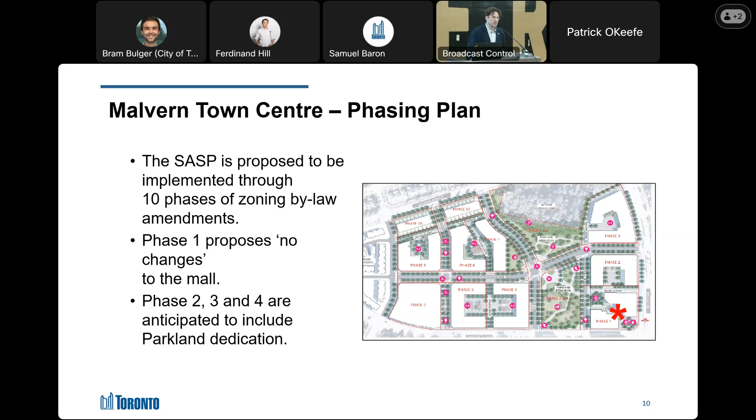As I mentioned, the one of most immediate consequence is the 32 and 39 story building on the surface parking lot. For those watching virtually and those in attendance tonight, it's where the red star is on the screen - that's the corner where they're seeking approval to build a 32 and 39 story building in the immediate future. Of course, this is all very early in the process, so we're here to hear from you this evening. We also have a lot of questions about the phasing plan and how this would relate to the operations of the existing mall on site today.

So how does the City of Toronto evaluate development applications? Let's say that somebody wants to go from this to this. How do we evaluate whether or not that sort of change is in the public interest?

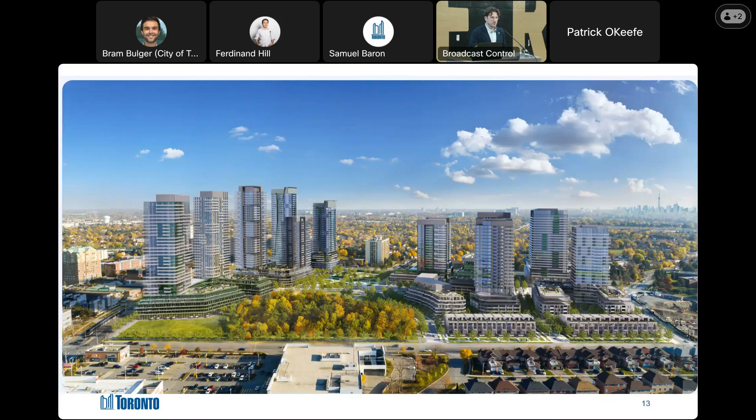In determining the public interest, city planning works to balance public, private, and community interests as part of our work. We look to a number of factors which help us make a recommendation to City Council on whether we can support an application like this. These factors essentially can be categorized into four different baskets.

The first thing we look at are the facts of the development proposal. So we look at the details of the height, the density, the number of parking spaces, and the physical context of the area - basically the surroundings of the site.

Secondly, we look at planning policies. The province has policies that we have to adhere to, and there's the City of Toronto's official plan, which is basically guiding development and change in the city - it tells us how to manage change. And then we have laws that we adhere to, like zoning bylaws and other land use planning laws that we are required to follow.

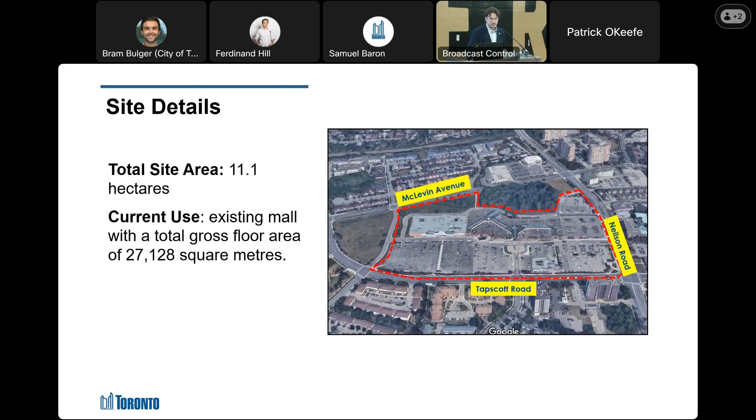Zooming out a bit, you can see McLevin Woods Park to the north. On the northeast corner, there's a self-storage facility proposed, which is unrelated to this application and has a separate landowner. To the west, there's a townhouse development currently under construction for 298 residential dwelling units.

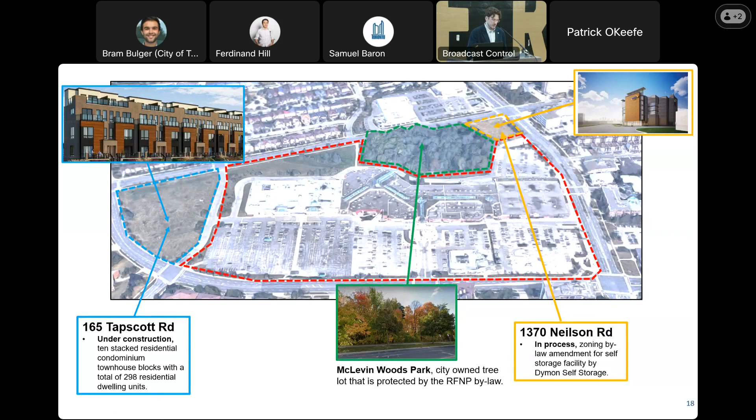I'm going to zoom out further so you can get a bird's eye view of the site. It's important to highlight the physical context of the area, as it helps inform the height and density that would be appropriate based on the existing context. There are a number of tall and mid-rise buildings in the area, some apartment buildings.

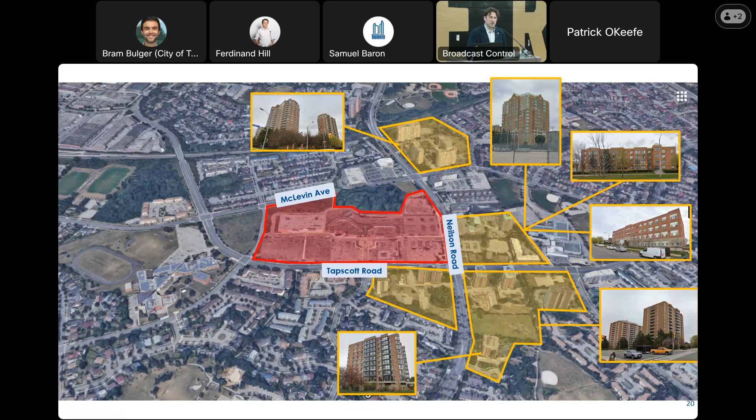The most notable ones are to the northeast, the Mayfair on the Green condo, about 20 stories in height. There are a few other apartment buildings to the south and east.

Then there are some commercial plazas to the north and east. There's a 3-story commercial building across Neilson, and the No Frills grocery store across McLevin.

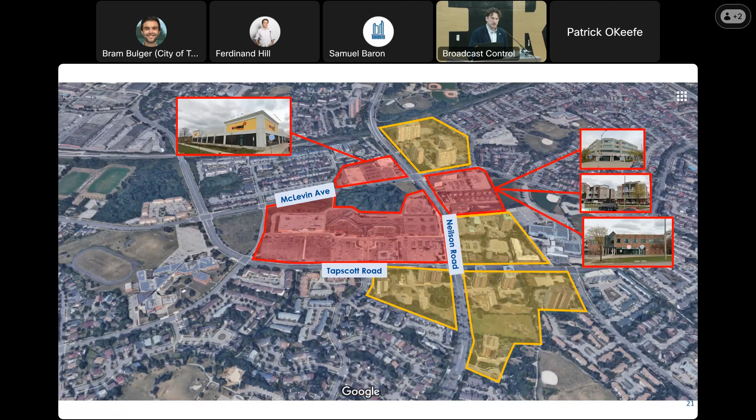To the immediate south, across Tapscott Road, there are some low-rise residential areas, notably some cooperative housing on the south side of the street. To the north, we have more low-rise residential houses north of McLevin Avenue.

So lastly, talking about the planned context for the future, it's anticipated that the Eglinton East LRT will be arriving in Malvern along Neilson Road. It's still really in the planning stages, so it's not completely fleshed out yet.

But it's really important to note, because if you're planning for an area where you're going to bring 10,000 new residents, a really big population growth, we want to ensure those people are able to move around and get to and from where they want to go. So that's an important part of the planned context, this potential future rapid transit possibly arriving in Malvern.

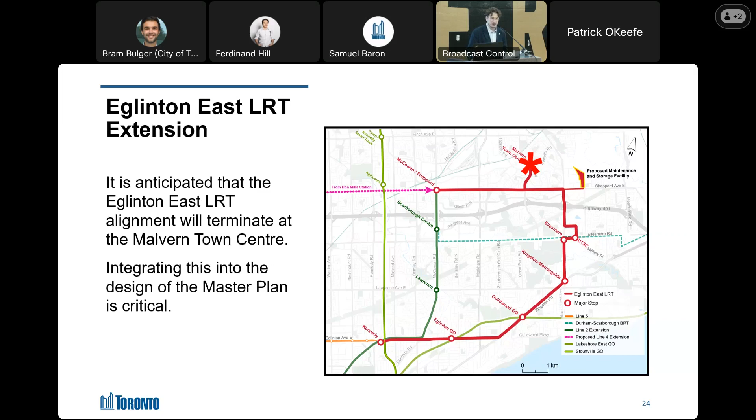So that's the existing and planned context. I'll move next to policies and laws, covering 2 of the 4 baskets I mentioned earlier.

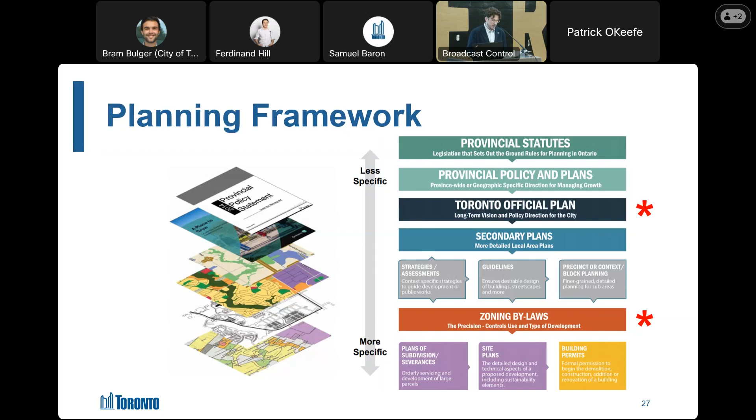Looking at what that means for the Malvern Town Centre, on the left we have the provincial policies I mentioned, which provide guidance on housing, the environment, heritage, transit, and employment. We implement these provincial goals into the official plan, which is the most important document for guiding growth and change in Toronto. It specifies how we're supposed to manage change and how the city should grow and evolve, and speaks to a lot of quality of life factors that affect people in Toronto.

So one of the primary ways that the official plan manages change is through land use designations. A land use designation basically says this is where housing can be located, this is where employment can be located, this is where stores should be located. In the case of the Malvern Town Centre, the land is designated mixed use, so the official plan provides the policy permission for residential and commercial on that site.

Right now, residential permissions are not permitted on the land because of the zoning bylaw, and that is part of the reason why the applicant is seeking to amend the zoning bylaw. But the official plan is important because it tells us that these mixed-use areas are anticipated to accommodate a lot of the growth that Toronto might see in the future.

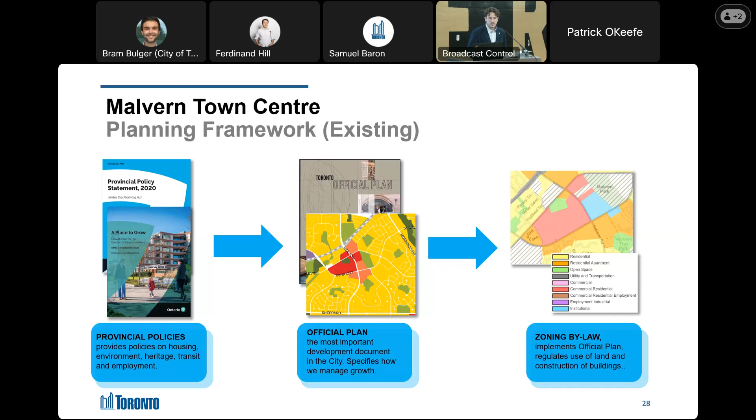And then we also have a few guidelines. I won't go into too much detail, but we have guidelines we follow for the design of buildings, intended to ensure that development is orderly and provides a really good public realm, a livable city. Some of the guidelines we'd be looking at in evaluating this application are the low-rise apartment guidelines, mid-rise guidelines, as well as tall building design guidelines.

In fact, there are so many mall redevelopments now in Toronto that we actually have a mall redevelopment guide. That's something we'd be looking to guide us through the different phases that are proposed, as well as to ensure we have precedent we can look at, so that if this application is approved, we would be employing some success stories from previous sites.

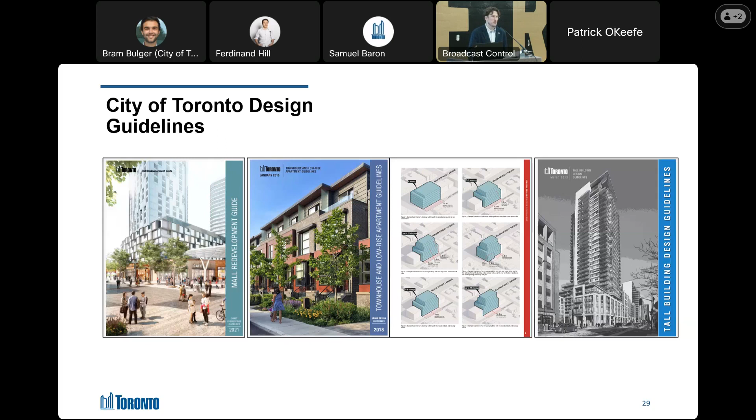So that brings me to the city's goals and objectives. The official plan really provides us with that blueprint for the different priorities and goals for a site like this, as I'd mentioned - goals for transit, housing, public realm, built form, parks, and other factors that support building a good city of Toronto.

So I'll quickly touch on some of the opportunities and priorities that we've been advocating for on this site since the applicant submitted their application about 15 months ago.

Really, this is a master planning exercise to establish a new neighborhood. I want to emphasize the importance of this consultation and your input, as we are curating and drafting a set of policies for the site and the surrounding community. They're proposing to basically build a brand new neighborhood, so your input's critical. In communicating our priorities to the applicant, we need to consider what are the critical elements of building a brand new neighborhood.

To date, the City of Toronto has provided feedback to the landowner on the first submission, which was in June 2022. I'll quickly touch on those. The very first thing we said is preserving the mall's retail and commercial function and its service to the community is top of mind. There are approximately 62 stores in the mall today - a very important component of the community - and the master plan needs to contain enough retail space in some format to ensure there's an opportunity for those stores, as well as providing ability for people to continue accessing those services conveniently.

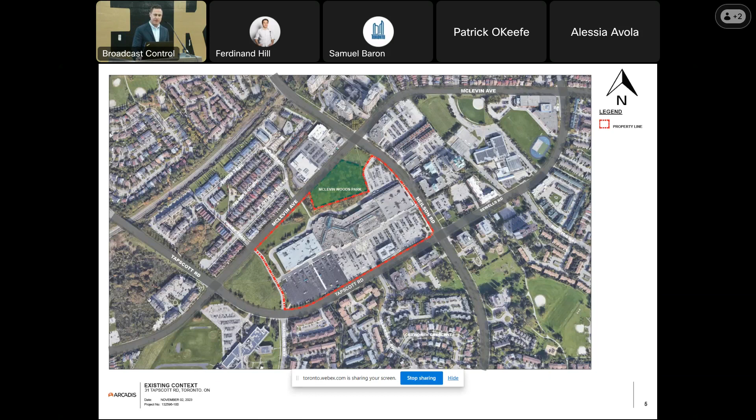Good evening, everyone. My name is Johnny Ria. I'm a principal with Arcadis Architects. We are responsible for the architectural design of the scheme in front of you tonight.

I'd like to mention that this scheme is the result of 2 years of very constructive review process with city staff, and we certainly welcome any comment from the community tonight that would improve the scheme and bring it to the next stage of approval. I believe the current scheme is very close to achieving the objectives of both city planning and the applicant.

The overall scheme I'm going to present tonight could be overwhelming in terms of scale and complexity. I'd like to point out this is not going to happen overnight. I'll show you during the presentation that we are projecting about 10 different phases over time, and each phase, depending on the approval level, is going to take 2 to 3 years, depending on the amount of density on the specific parcel of land.

So my team and I believe this is good planning. We're not coming in with just one parcel at a time. We're looking for a vision for the whole block projected over the next 20 years, in view of the investment in the new transit line, which will certainly justify additional density, and in view of a parcel of land that is certainly underutilized, showing a very suburban typology at a time in a city that is rapidly expanding and certainly requires additional injection of population.

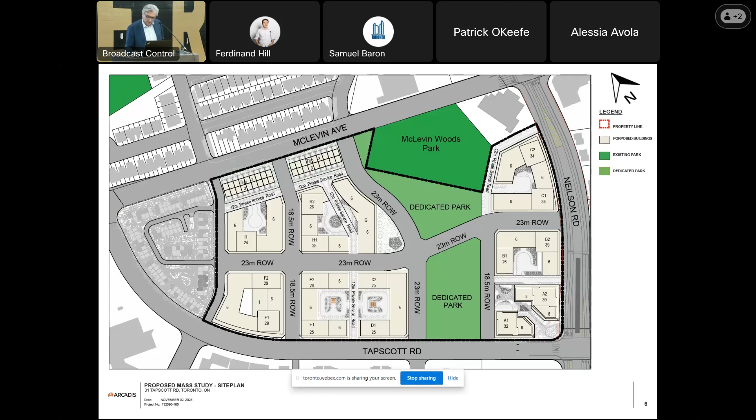The extended park that I mentioned before is going to become the central element organizing the site. And the remainder of the back of house and necessary room to service the building, in terms of the underground parking and the pickup facility for garbage and moving, will be fully integrated within the build form, away from the pedestrian traffic.

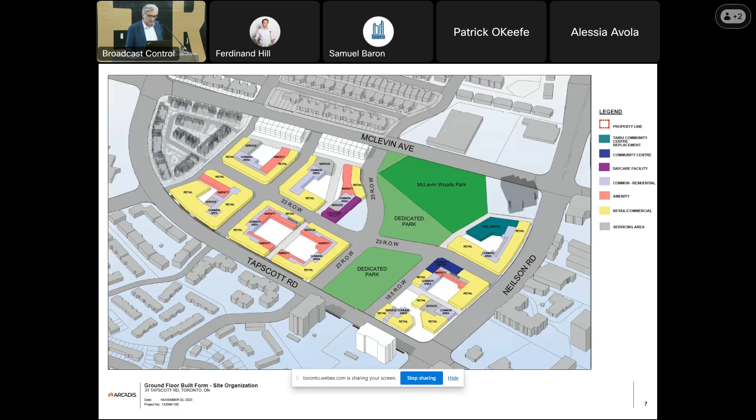The build form along this would be 4 to 6 stories, and again, it's going to be in proportion and in scale with the pedestrian use. The towers will be properly set back from the podium and will reach height depending on the location within the site. Again, we're trying to create a transition between major arterial traffic and more sensitive areas like McLevin, where a lower density is envisioned.

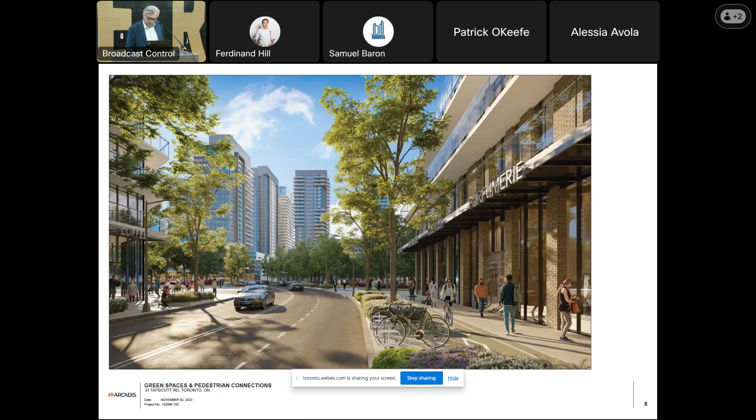Phase 2, the proposal moves northbound along Neilson. Part of the mall will be demolished. The western portion of the mall will be retained, in particular the food store will still be kept in place, with proper surface parking and servicing in the back.

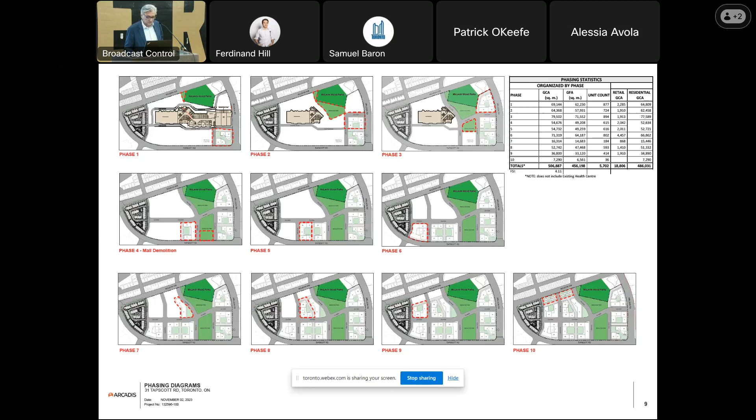You can see the central park, which is creating this transition between the east portion of the site and the west, and the different height of the tower above the podium, which is going to certainly reflect the higher density at the major intersection of Neilson and Tapscott, and going down as we proceed to the west into lower density.

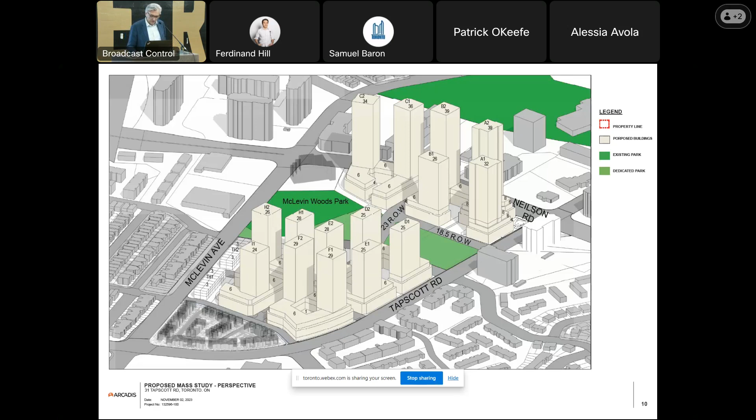This is a view along McLevin looking east, showing the relationship between the 3-story townhouses that we're proposing on McLevin. Again, a transition is provided between the higher density and higher built form along the south portion of the site, and this built form is very much in keeping with the scale and proportion of the existing townhouses on McLevin.

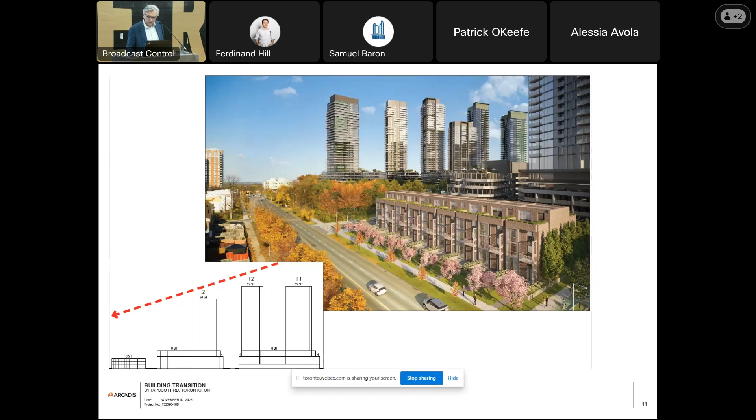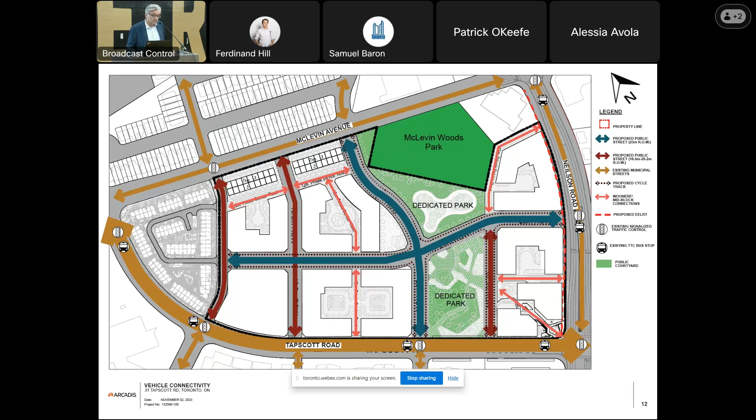I was talking about the different layers. So this is the vehicular traffic showing the hierarchy, the different widths, the 23 meter of the blue, the major artery north and south, and the two different lower hierarchy of street, depending on whether it's just a mid-block connection or whether it's actually just a laneway, which is going to be servicing the inner part of the block and the service area for the different ground floor activities.

Details of each one of these different rights-of-way are indicated on this drawing. Again, the vignette that you saw, the computer-generated image, is very much trying to capture how the pedestrian would feel in that kind of environment.

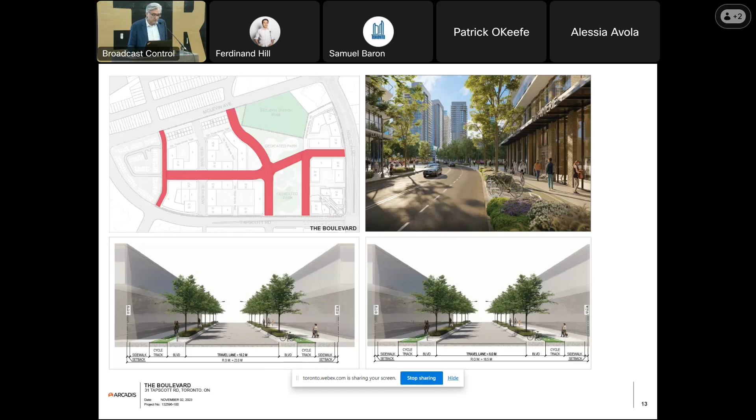The largest sidewalks will provide opportunity for spillage of the retail activities into the street. You will have plenty of opportunities for green spaces to be provided along the way, and the proper space for the bikes and the proper space for the vehicular traffic. The lower two diagrams are showing the specific dimension for each one of these different roads proposed.

Private roads are referred to as woonerfs. Again, these are pedestrian accessible, publicly accessible. They will allow for the pedestrian traffic and vehicular traffic to basically travel through the blocks, allowing easy pedestrian connection and servicing at the same time of the back of house facilities.

These are not back alleys. They are going to be fully landscaped, properly treated day and night, servicing as a real street. So we're paying a lot of attention to the landscape design. These, again, are going to be looking like a service lane, but they're going to be very much welcoming the public and the traffic at the same time.

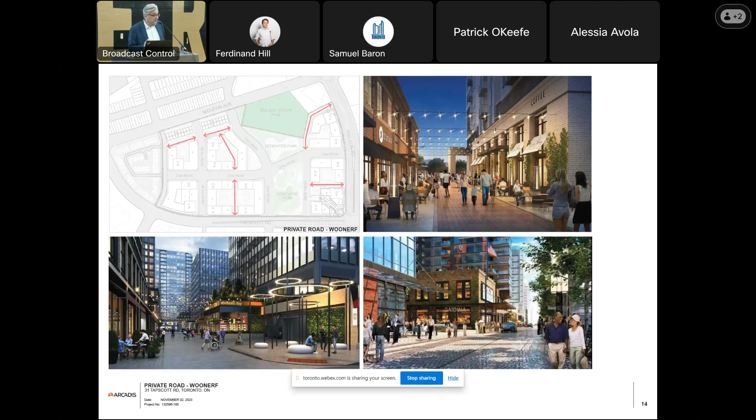Different edges. Again, these are one of the different layers that we are considering for the proposal. Attention was given to the landscaping, rails, pedestrian ability to use the sidewalk, spillage of cafes, restaurants, and so on and so forth. Very much something that for some of you, if you're familiar with the shops at Don Mills, that's a very good example in Toronto of how that kind of relationship with the ground floor retail can be spilling into the outside and create opportunities for a great pedestrian environment.

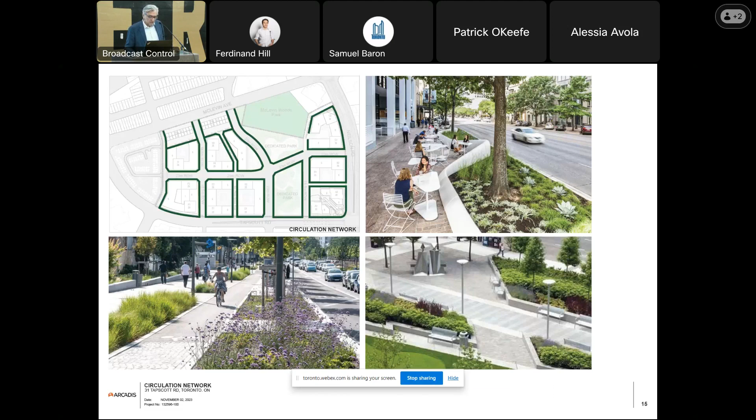The Central Park will be certainly subject to review by city staff, and I'm sure that the programming of that Central Park will be shared with the community. City staff will be looking for community input in what kind of structure and what kind of activities could take place in that location.

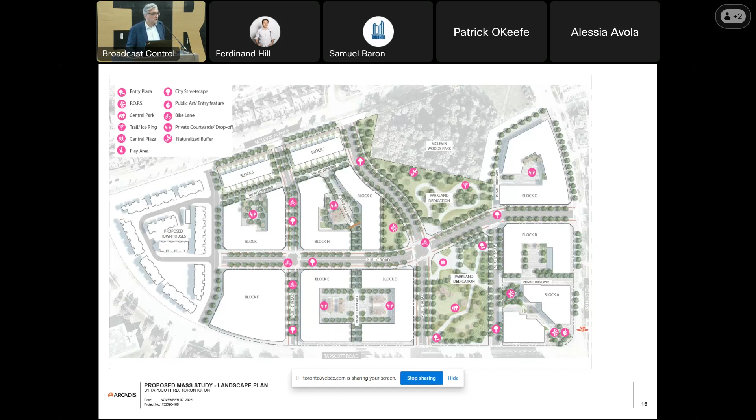Central Park's location and expansion was a natural resolution based on the existing location of the woodlot. So we took that as an opportunity to start this green initiative, starting from the north of the site and running right across north-south, creating this buffer and great pedestrian connection between the north and the south.

This connection is away from the traffic and away from the built form. The programming has many different options, and I'm sure the community will have a say into the kind of activities. To the bottom of the presentation, this computer image taken as an aerial view from McLevin shows how the combination of the existing woodlot with the additional 17,000 square meter addition to the south would look within the built form.

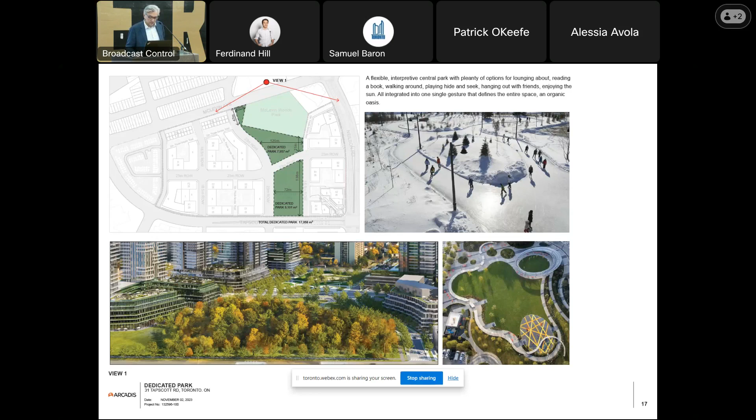In terms of an additional layer of activities and different uses, in addition to the fully dedicated park, we're proposing two locations for publicly accessible but privately owned plazas. The one at the south corner is part of phase 1, and it creates a gateway, a pedestrian gateway to the rest of the site.

Still during phase 1 and phase 2, we'll provide access from the Eglinton light rapid transit stop along Neilson, and we provide a welcoming gateway to the inner block and to the park in a future phase many years from now.

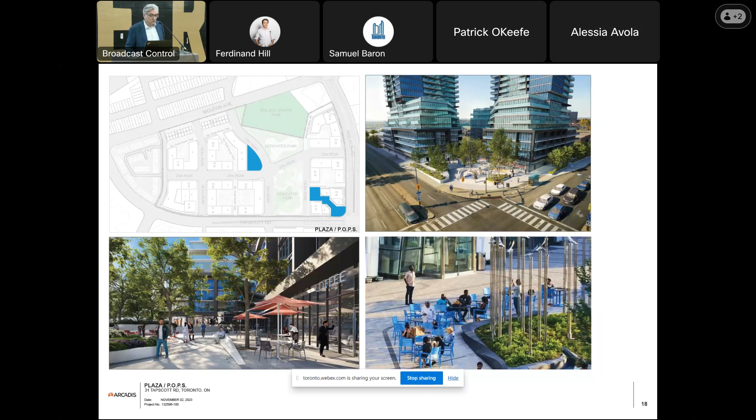The image to the top right is a computer perspective suggesting how this outdoor plaza would look in the future, intended to welcome pedestrians and channel them into the inner portion of the future block. The lower two images try to recreate the atmosphere and full intention to expand the activities of the ground floor into the streetscape to become part of that kind of environment.

During the pedestrian experience through the block, besides the boulevard condition, the intermediate connection and the view to the block, pedestrians will also have access to the courtyards of each of these blocks. The courtyards show two different kinds of environment: one private and one public.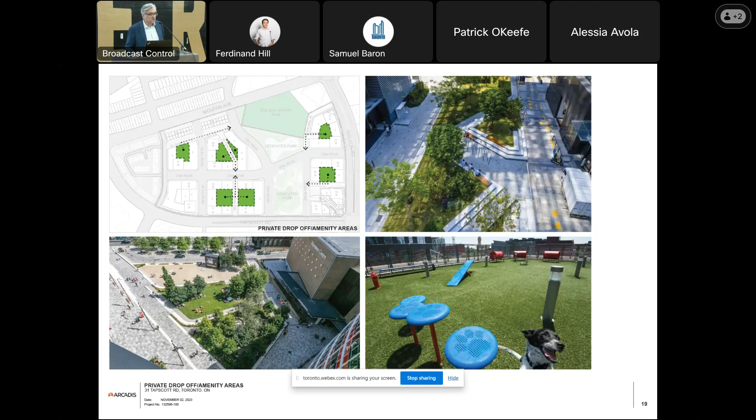There will be a journey through the different blocks proceeding north or south, and people will have the opportunity to enjoy fully landscaped courtyards. Some will be available for general usage, and some will actually be part of the requirement for private amenity space for the exclusive use of tenants.

The locations will be some on the ground floor and some on the rooftop of the 6-story podium level I was mentioning. The footprint of the tower will be much smaller compared to the footprint of the podium, leaving the opportunity for rooftop green initiatives and outdoor amenity space.

We're showing here some examples from other projects where the rooftop actually becomes a very active space. It responds to some of the green initiatives and creates animation 24 hours a day, an additional layer of all the different initiatives I mentioned during the presentation.

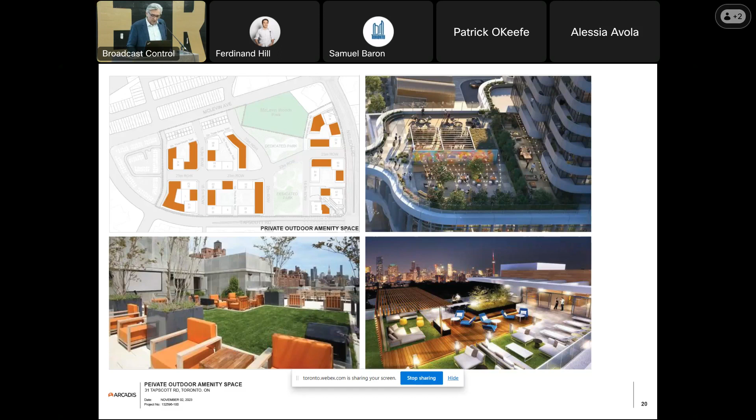And I think that's the last presentation for the architectural part. Thank you.

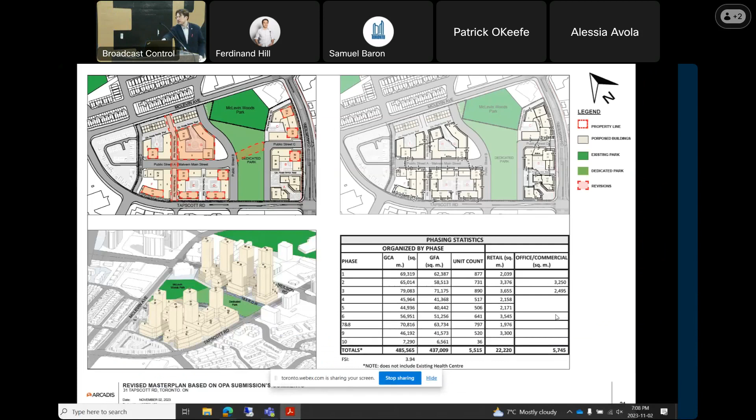Sorry, can you grab your computer?

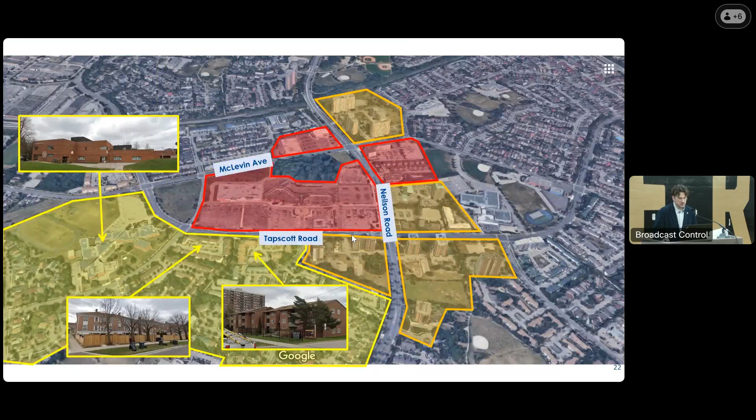Malvern Mall, there is a cement bridge that goes underneath Tapscott. That used to be an actual dirt road, and that dirt road would just go straight through the parking lot, right beside where they're building those new homes, and the grocery stores in the mall corner. That farmer would go all the way down. There used to be train tracks at the end, and a wooden bridge, and he was just dumping this stuff off into the fields. It was all farmers' fields, so it would go over towards Neilson, this entire area here.

Now, it affects your thyroid, so you don't really know much about it. There's no pain associated with it. I did lose my voice for one year. The doctor took a nerve out of my shoulder and constructed a new vocal cord, so you hear my voice a little raspy. I wouldn't want anybody else to go through it.

It's not necessary, but the land, especially for the guys working there, a lot of the new homes being built in the area have no basements. The government knew about it. They just decided to leave it, I guess. Not sure, but anyways, thank you.

Yeah, sorry, apologies, the microphone was off. Yeah, thank you so much, Jeff.

I believe that regarding a soil gas assessment, for example, we require soil gas assessments all the time for contaminated land. I've just personally not encountered radioactive contamination. Are you aware of this?

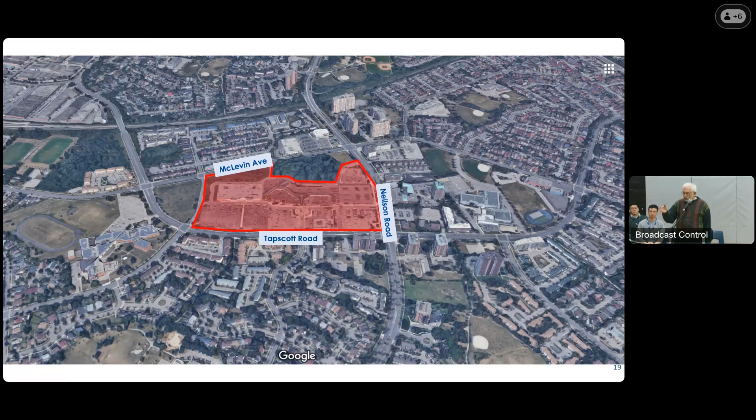It's going to be a very dominating, obtrusive development that completely takes over the whole neighborhood, together with the fact that on the corner, which you're not responsible for, there's going to be basically a self-storage warehouse nine stories in height, right at the corner of Neilson and McLevin. It's going to totally change the appearance of this neighborhood, and not for the better, I don't think. Thank you.

Thank you for your comment. Andrew, did you want to respond about the number of parking spaces?

Sure, just very briefly. Yes, the visitor parking will be underground, so there will be almost no surface parking in the new developments as they develop. The plan is to meet the city's standards for visitor parking. The city actually has a zero parking requirement now for residential, so they've reduced that greatly in the last year. But there will still be parking even beyond that for residents and visitors.

Good evening, my name is Nigel Sandy. First, I just wanted to start by recognizing you, Sam, for being receptive and open to feedback. It's not easy being the first person to host a hybrid event coming out of the pandemic. I can appreciate that—once upon a time I was responsible for community engagement on the Scarborough subway extension. So thank you for trying to make this experience inclusive for everyone here.

I do have a question, and I also want to appreciate the elected officials for being here and advocating for the preservation of some of our vital services, in particular the community centers that offer services to our residents. But I have a question regarding the preservation of retail and commercial spaces. Does the application identify the number of retail units planned in this proposal? Is there specific criteria for the types of tenants being targeted? And lastly, if current tenants aren't part of that future plan, is the developer proposing financial resources to support them in finding relocation?

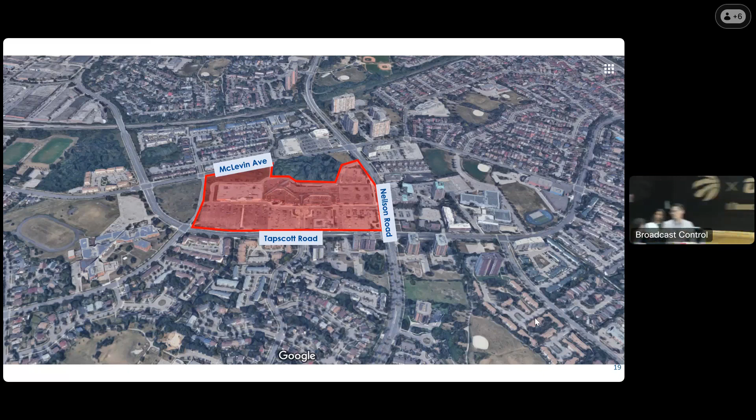Just a question about, there was a mention of heating options and possible geothermal. Given a site this large, it seems like there's potential for district heating rather than having it necessarily on a building by building basis. Has that been investigated, and what would be the options there, and what's the rationale for the current choice? Thank you. That's another really good question.

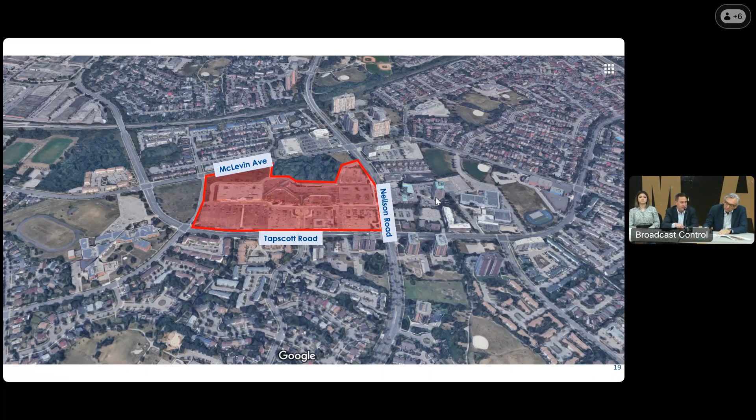So district heating is something that's probably a niche concept that not a lot of people know about, but it's essentially a mini power plant. And we actually work on projects like this in the city of Markham, which has a district heating strategy. That's not something we've talked about on this project yet. I'm not aware of the city having a program like that, but that's a very interesting idea.